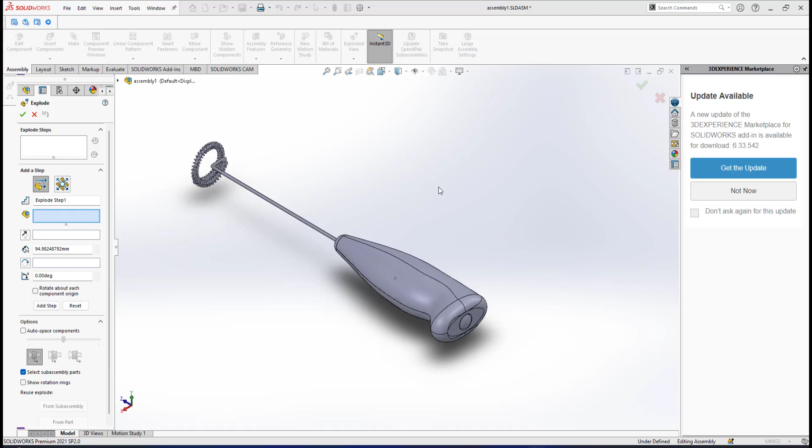Before we do the exploded view of this Frother, looking at the settings on the left, the first thing is about explode steps. Explode steps mean that whatever part or component you pick and move to a different position will be recorded as an explode step. For example, if I select this top casing and move it to a different location, it would be recorded as explode step 1.

Then I select the bottom casing, put it to a different position, and it will be recorded as explode step 2, and so on.

In order for us to do this exploded view of the Frother, the first thing is that we need to plan how we will dismantle this product.

Logically, when you look at this Frother in full assembly mode, if you want to dismantle it, the first thing is deciding what components or group of components you will open first and move into a different position, before you can dismantle the other components. This means we need to plan the order in which we dismantle the product.

For this Frother, the way I plan it, if I want to dismantle it, the first group of components I will open is this opening lid at the back, along with all the related components attached to it.

Logically, if you want to replace the two AAA batteries, you will slide out this opening lid and its group, and then you can replace the batteries. So this is the first group that I will record as explode step 1.

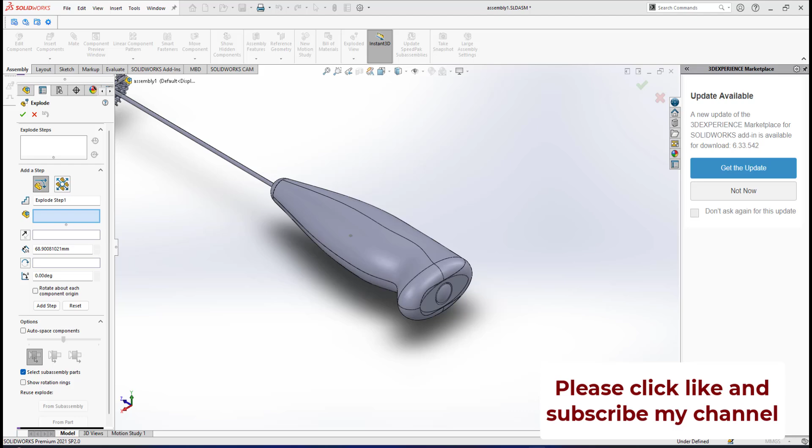Then for explode step 3, I will select the top casing, so I can dismantle it and put it in a location above. As for the bottom casing, I cannot move it since it acts like a platform or base, meaning the bottom casing stays at a stationary point and cannot be moved because it will be the base.

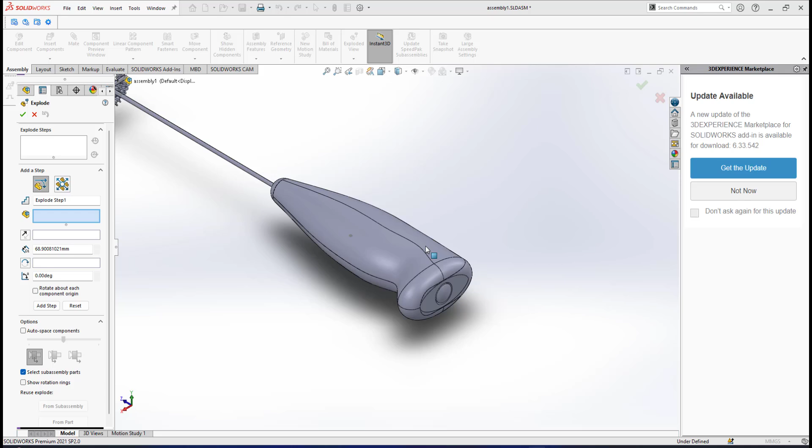Once the top casing is placed above, I then select the group consisting of the rod, the flexible coupler, the cap, and the motor, and move them to a different location. This is how I plan to dismantle the product logically, as if working with the physical components of this Frother.

Now let me show you. The first step is to select here - my first exploded step will be the group of this opening lid and all the components attached to it.

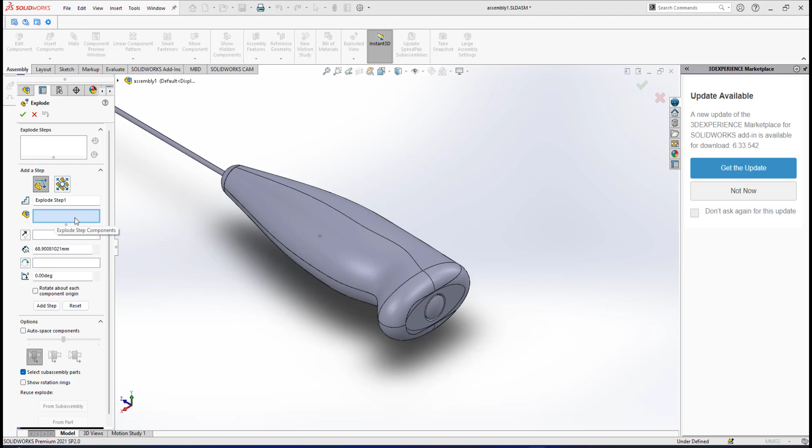Under the settings on the left, explode step 1 is highlighted, but I have not yet selected which component to put here as my group for explode step 1. Let me zoom out a little bit. Here we have the list.

I click open the list here. My group to be exploded for step 1 is the opening lid and all the related components attached to it. So I will select the opening lid, and then all the related components, like the push button.

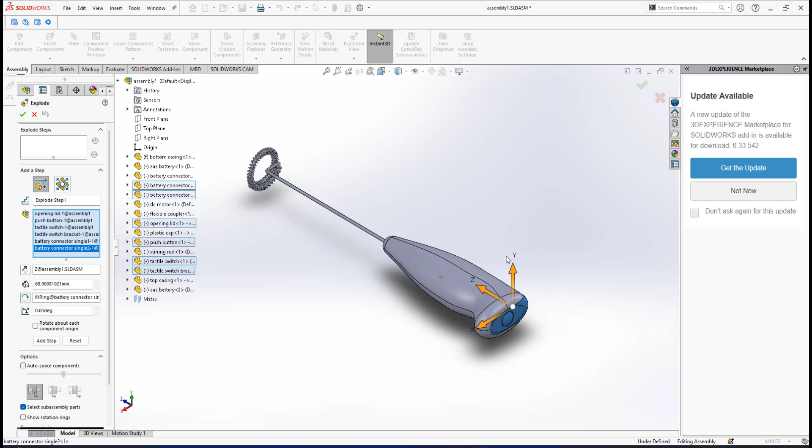It's listed here: the tactile switch bracket, the battery connector single 1, battery connector single 2, and the push button already selected, the tactile switch already selected. So that's all the group of the opening lid and the components attached to it. Here in this icon, if you look at the group of components, I kind of have an icon like an axis.

I want to slide it in the X direction, to the right direction. So I will go for X direction, and move it to this location, putting it into this location. SolidWorks will record it as explode step 1.

But the important thing here, you must click done. If you don't click done, it means SolidWorks will not read your first setting as explode step 1. So I click done, and only after that will it be recorded as explode step 1.

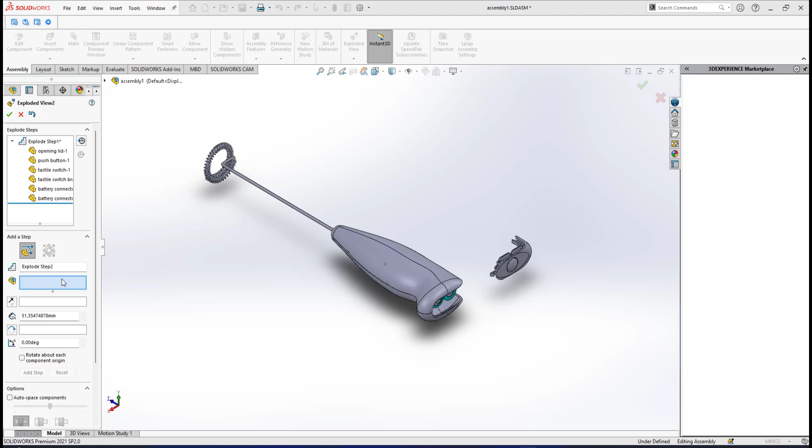If you look at the setting on the left, explode step 1, all the related components have already been recorded for explode step 1. It means this opening lid and all the components have been slid out to the right. Now the setting is asking about explode step 2.

Logically, to dismantle this frother, for explode step 2 I will remove these two AAA batteries and put them in this location. So for explode step 2, I will select these two AAA batteries.

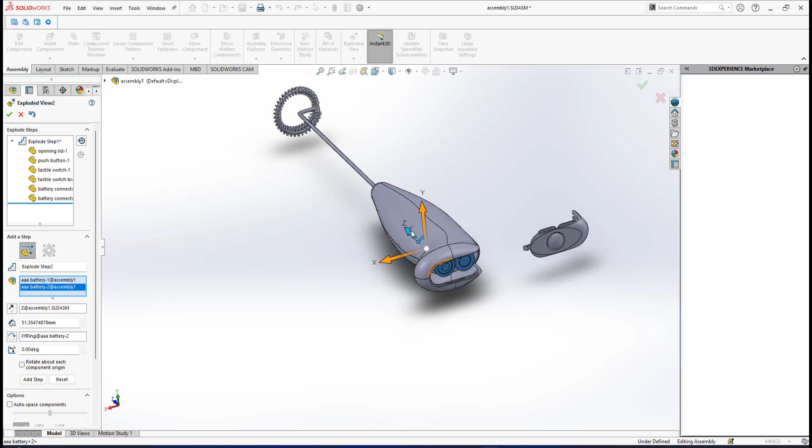So we have the axis here. I will go for Z direction, and bring it out until the position I want them to be. You can also give a distance here, in the Z direction.

I just leave the two AAA batteries at that location. So I must click done — this is important, you must click done — so SolidWorks will record it as explode step 2. So we see here explode step 2, we have this.

Be careful about it. When you click on explode step 2, it's still asking which component to put into this explode step 2. For example, if I highlight like this, it's kind of like editing. Whatever you do, you cannot straight away — if I put my mouse and highlight explode step 2, it's asking what component I need to add more for this explode step 2.

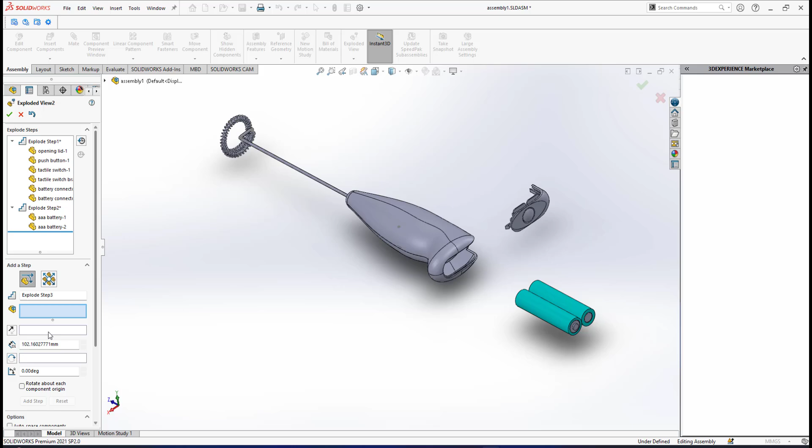Already done — select these two AAA batteries. Whatever you do, once you highlight here, you must click done first, so it will go to explode step 3. Because the setting here is quite sensitive, make sure that when you're editing, you click done. Then only will it go to the next step, explode step 3. Be aware of that.

After I've removed these two AAA batteries, my step 3 will be, of course, the top casing. So I will select this top casing. Now under explode step 3, the top casing is already listed.

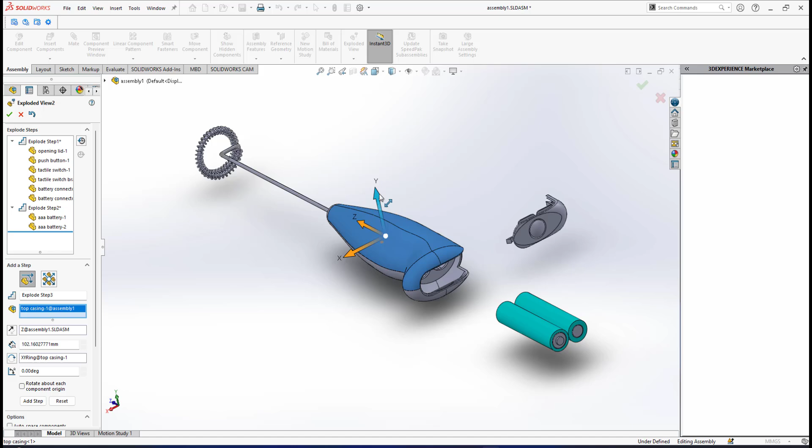So I bring my mouse to this Y direction, and bring it up until this position. Be careful, you need to click done, so it will be confirmed and recorded as explode step 3, and it will then ask about explode step 4.

For explode step 4, since I've put my top casing in the above position, the thing I need to do is select these metal connectors and put them above. So I select these metal connectors and put them up until this location. Then I must click done.

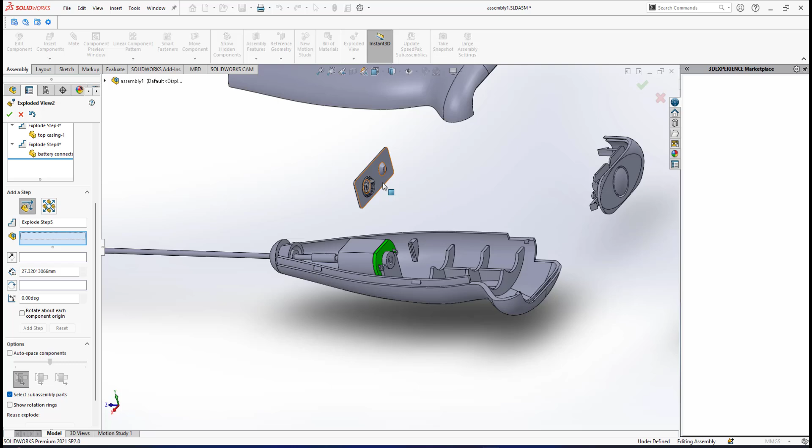Actually, you can edit it back to adjust the location of your component. So I just leave it at that position for these metal connectors. Now it's asking about explode step 5.

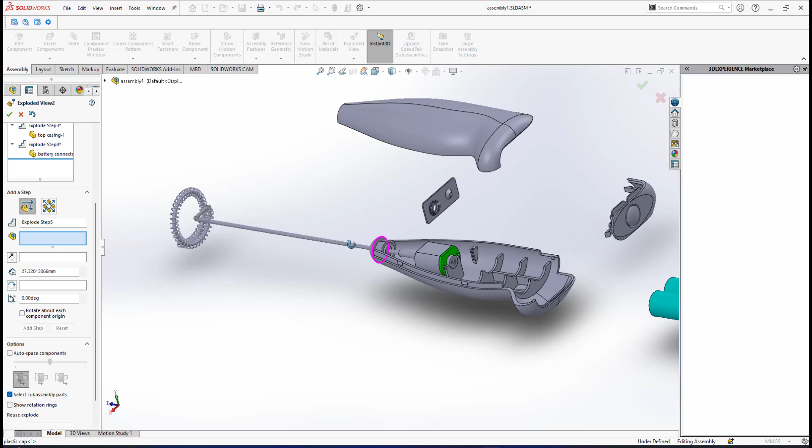For explode step 5, I cannot just simply pick this coupler and put it in a different location — I have to make this disassembly in order. So since I've put the metal connectors up here, my next step is that I cannot simply select the motor and put it up for explode step 5, because it's kind of like we have a group here.

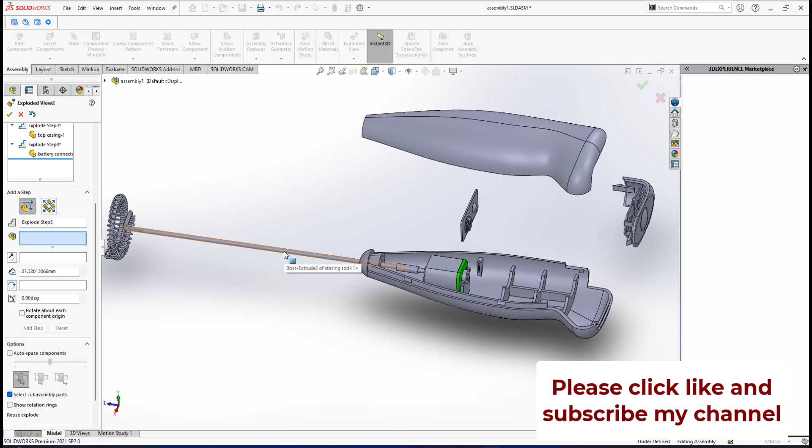This motor, the coupler, the cap and the shaft are kind of like under one group. So for explode step 5, I will select the motor, the coupler, the cap and the stirring rod, and put it above first at this location.

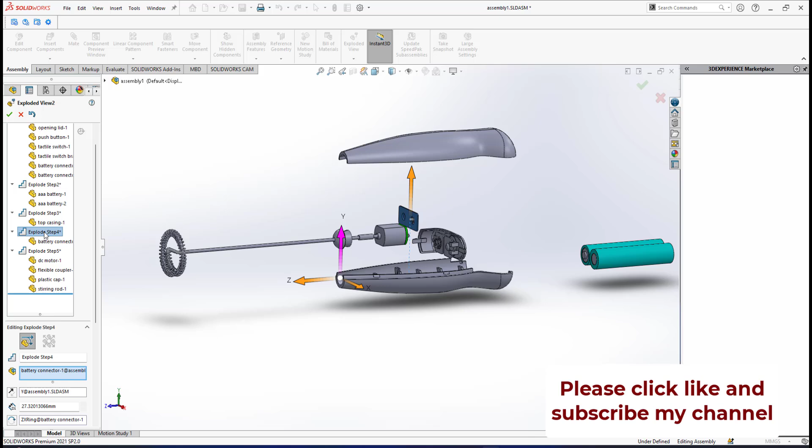Okay, let's say if I want to adjust the height of these metal connectors, I think it should be close to that DC motor location. So I can scroll up here. Since that battery connector is explode step 4, I click at that explode step 4, then I bring these metal connectors up a little bit above. Alright, so I must click done to confirm it.

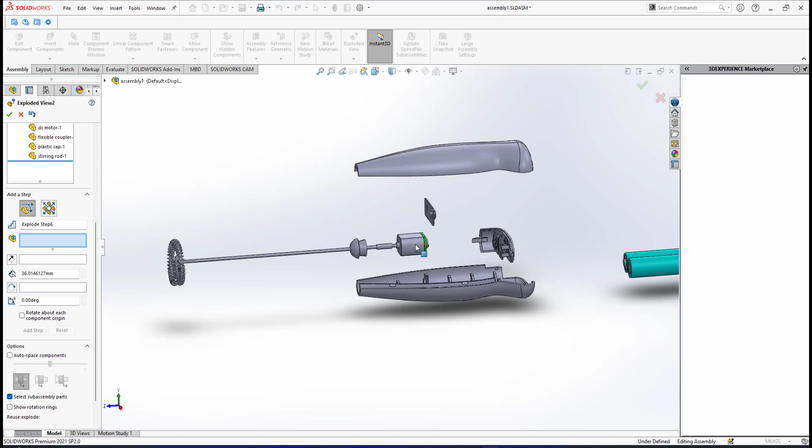Okay, now it's asking about explode step 6. Since I have this group of DC motor, coupler, cap, and rod, what I will do is slide this stirring rod up until this location. Then I click done, so this will be explode step 6. Now it's asking about explode step 7.

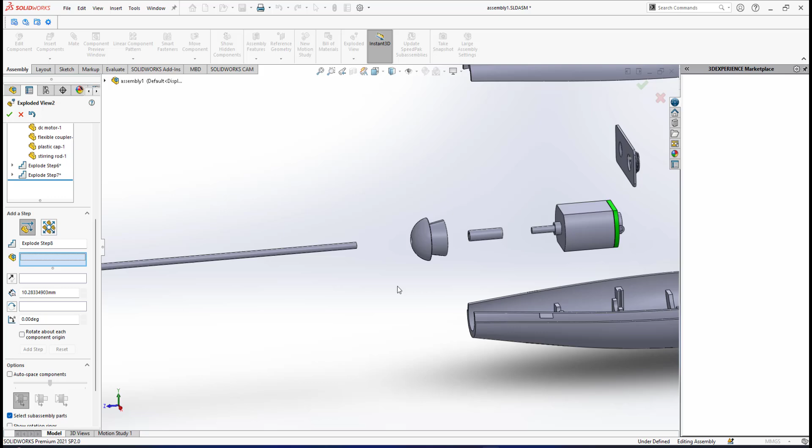It's kind of like I select this coupler and also this cap, and move it up until this position, so it will be recorded as explode step 7. Then I click done. Right now I've set my explode steps from 1 to explode step 7.

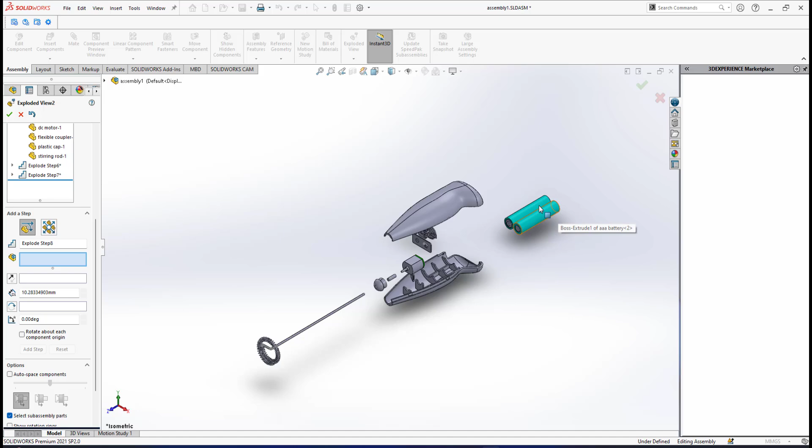Alright, before I go for explode step 8, let me go to standard view. Okay, this is the view that I want the exploded view to be, this is standard ISO view. So if we look from this view, I need to do some adjustment in terms of the height level of my component. For example, this top casing here is too low.

Okay, I can scroll up here. Top casing is explode step 3. I click at that explode step 3, and bring this icon up a little bit, so it can show the features of this opening lid. Alright, I have adjusted the level of explode step 3. I'm still editing explode step 3 here. If you look at the setting on the left, make sure that any adjustment I've made, I must click done, so it will be confirmed and recorded.

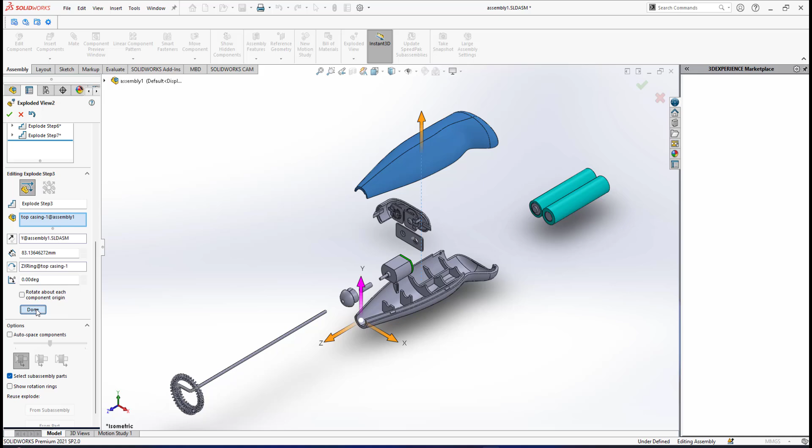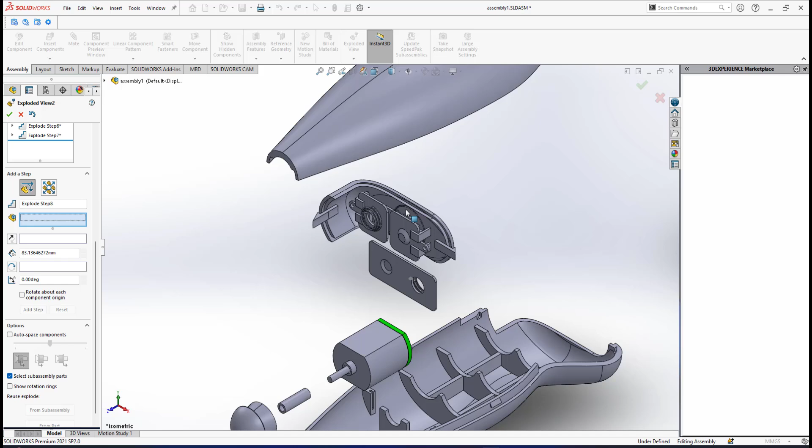Okay, now it's asking about explode step 8. About explode step 8, since I've already dismantled all the components shown here, the only one left is this sub-assembly of this opening lid. So for explode step 8, I need to really plan it.

Okay, let me just scroll it like this. Later I will go to standard ISO view. About this explode step 8, this will be the explode step for this sub-assembly of the opening lid. I will keep this opening lid as the base, I will not move it.

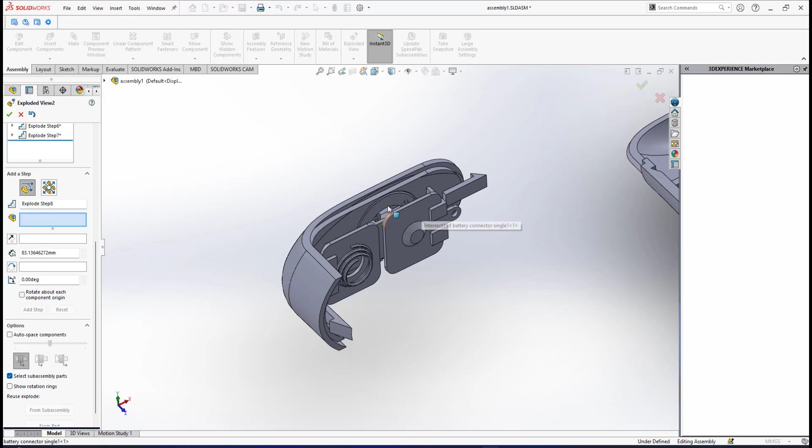So what I need to move for explode step 8 is select these two metal slots here, because we disassemble this component in order. So I will select these two metal slots, and bring them up to this position. It's okay, you can adjust the height later. Okay, I just click done, so it will be recorded as explode step 8.

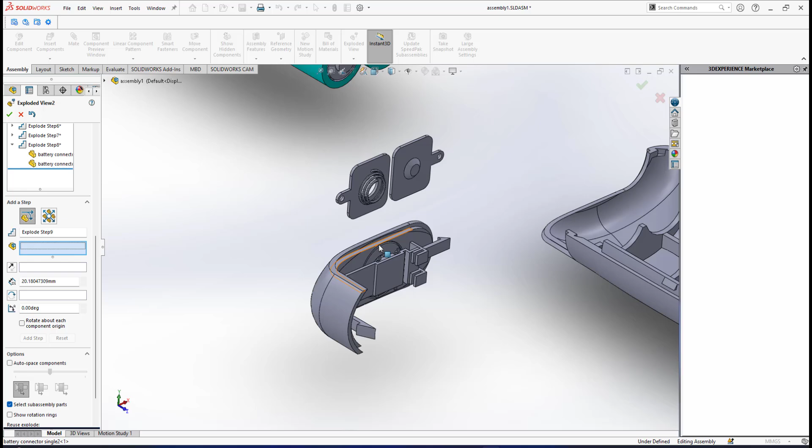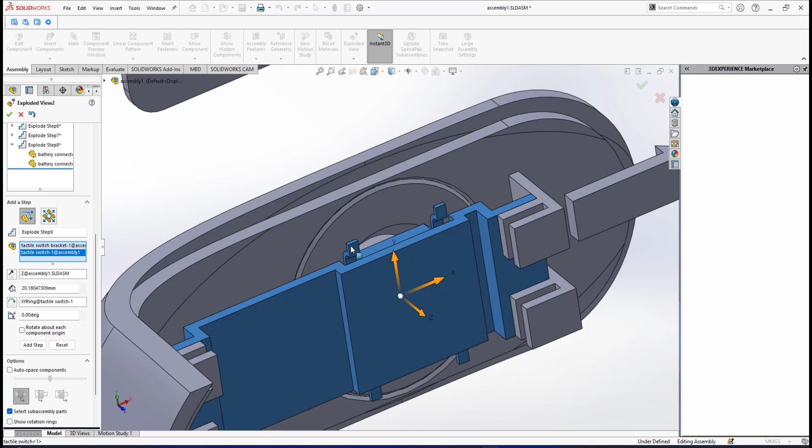Alright, about explode step 9, if I have removed these metal connectors, I put it above. Logically, I will remove this bracket here for explode step 9, bracket and the tactile switch, because they are together. So this will be my explode step number 9. Okay, I just put it there, up to this location. I must click done, so it will set the setting for explode step 9.

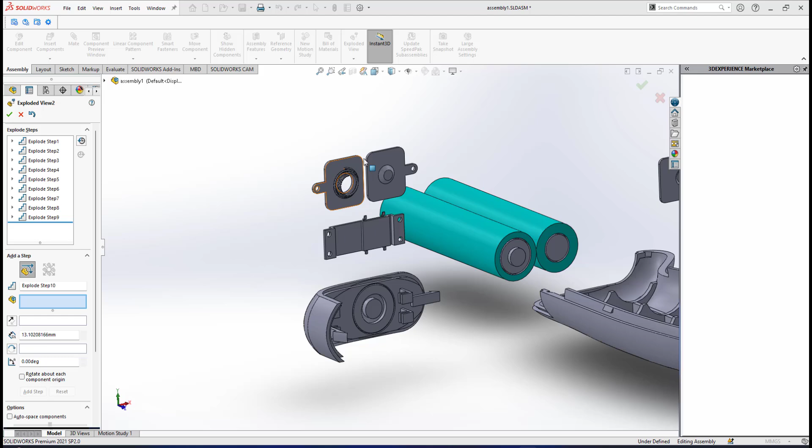Okay, let's say if I want to adjust this explode step 8, I click at explode step 8, I adjust it a little bit like this, and I click done. Any adjustment, you must click done to confirm it. Before I go for explode step 10, about these two metal connectors here, I need to do adjustment, this is under explode step 8. I click at explode step 8, I bring it a little bit above, and click done to confirm it.

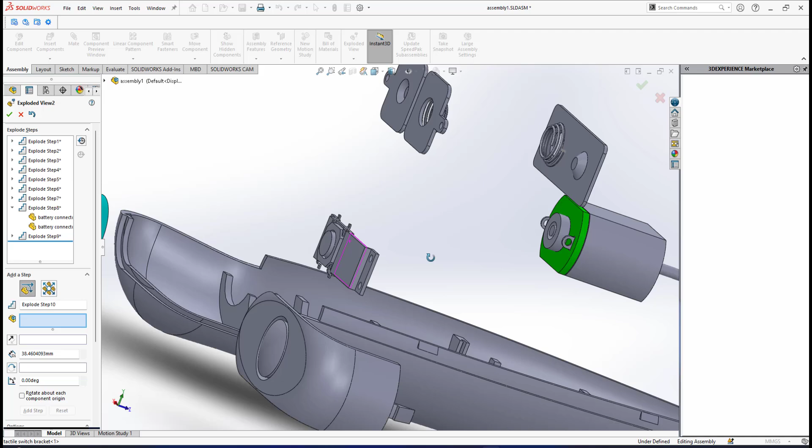Okay, about this bracket here and the tactile switch are still together. So about explode step 10, I will select this tactile switch and bring it to this location, sliding it out above. Alright, I click at done.

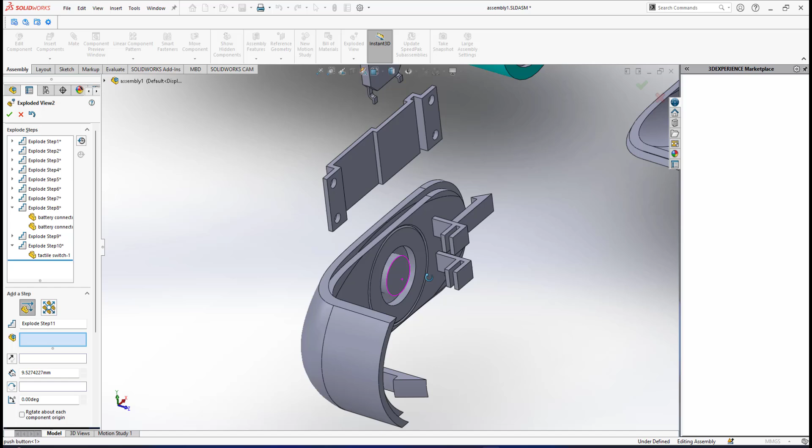So it will be recorded as explode step 10. I think the last one, explode step 11, will be this push button. I cannot slide it out to this direction because logically you cannot remove the push button that way, since it's already prevented by the shoulder of this opening lid. So for explode step 11, I will select this push button and it goes here. This will be my explode step 11. I click done.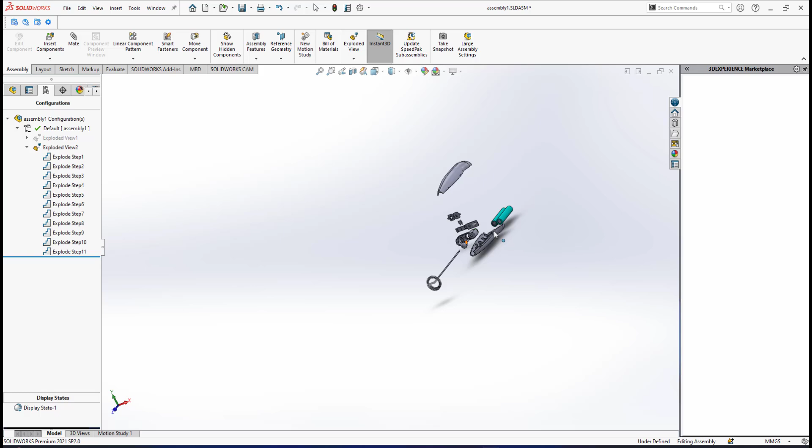Then I click OK. So it means that I have already set the exploded view for all my components. Let me go to standard view. So this is my exploded view of my component.

Since I've completed this exploded view of the components of this milk frother, if you look at the setting on the left, I'm now in tab number 3, the configuration manager. By default we are in feature manager, like the common listing for assembly. About the exploded step, you can check under the third icon, configuration manager. If you look at the list here, I have exploded view 2. Exploded view 1 is grayed out because I've done this before. What I've shown you just now is my exploded view 2.

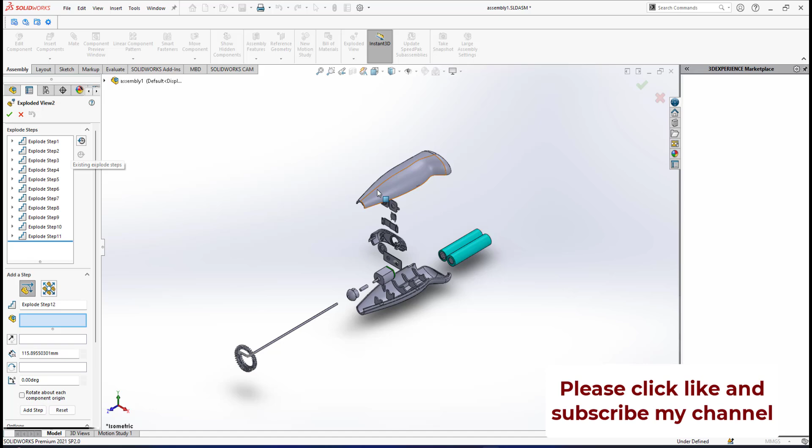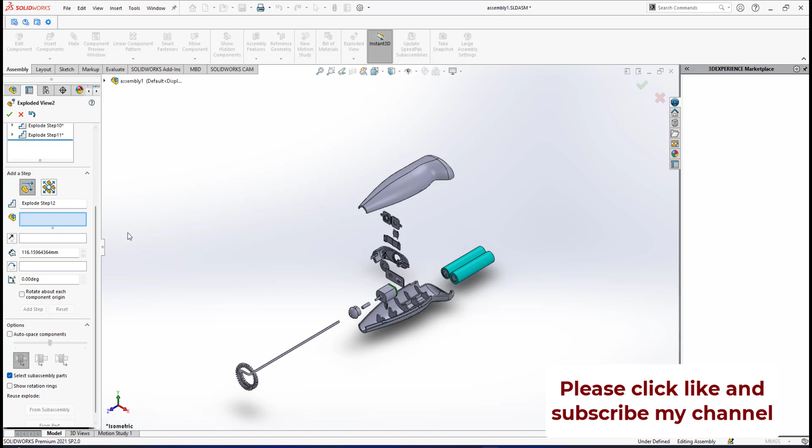For example, if I want to do a final adjustment for this top casing, I want to slide it upward a little bit. So in my exploded view, I click here, right click the mouse, and go to edit feature. So I have the setting for this exploded step. Since my top casing is explode step 3, I click explode step 3, then do the final adjustment to make sure the top casing at this position shows these two metal connectors. Whatever adjustment I made, I have to click done. Let me click OK. So this will be my final adjustment.

If you look here on the left, we are on configuration manager. By default we are on feature manager first. Under the feature manager, we have the first list, assembly one. If I bring my mouse here and right click, I go for collapse. So we go into collapse mode, and this is the full assembly mode. If I right click again, I go for explode, and we go into explode mode. Let's say if I bring my mouse, I go for collapse mode again.

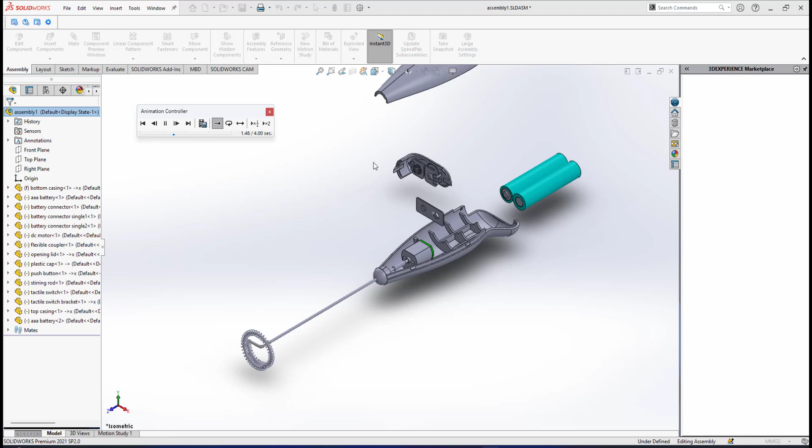So I can even play animation for this. If I bring my mouse here, I have an option here, animate explode. So we can show a kind of animation or simulation that shows how our component is disassembled in order. Let me play again. Let me zoom it a little bit. I can play this again.

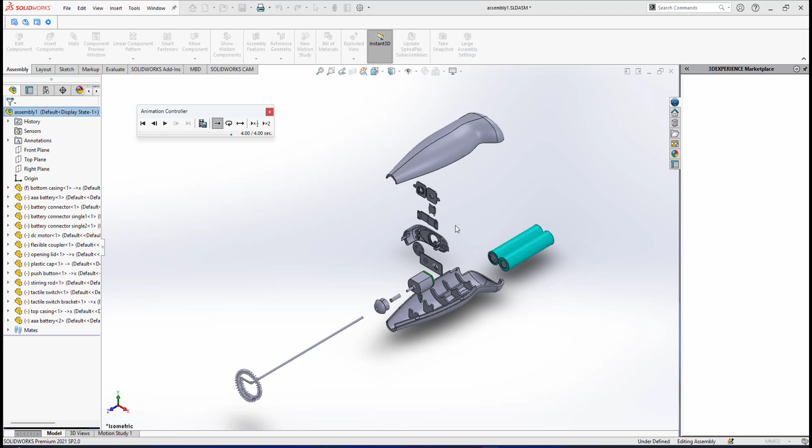So we can even save this animation file, maybe to send to the client or another department, kind of explaining how this product works, how the components relate to each other, by showing this motion. We can even go under explode mode, play animation, animate collapse. It can even go in the reverse direction. Now it shows how this product is assembled back to full assembly.

The next thing to do, since I've made this exploded view of this milk frother and all the components are in position in exploded view mode, later I will show you in my next video, inshallah, how I will do assembly drawing and also exploded view drawing. Because for this Milk Frother project, we need to produce a set of working drawings.

A set of working drawings of a product means we have to show the first drawing, which will be the assembly drawing in 2D or orthographic. The second one will be the exploded view drawing. That exploded view drawing is not in orthographic, but shown in isometric mode. So this view here, as shown, is isometric mode.

But when people read the exploded view drawing, because it is more user friendly to show the product, how the product is disassembled, if we just produce the drawing like this, it's kind of difficult for them to understand.

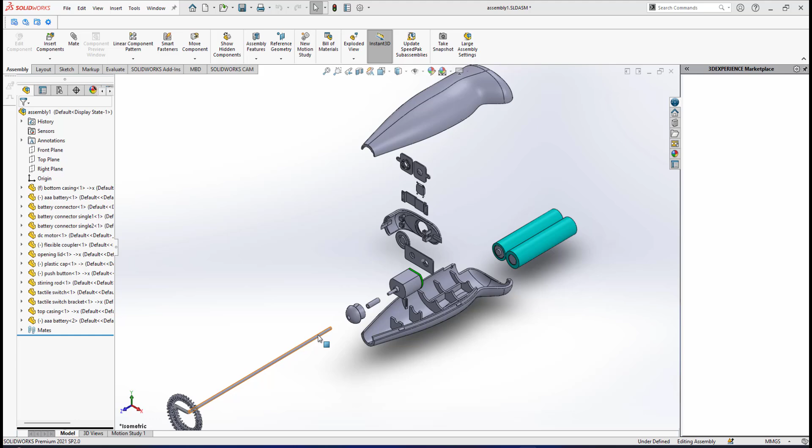For example, how are these things connected, related to each other? In the SolidWorks file, I need to create a path showing the line of how this part gets disassembled. For example, how do these two batteries get mounted onto this rib? I need to show the line, the path of how this battery slides in and where it will be mounted. In SolidWorks, this is called an exploded line sketch. So for all these components, I need to show the path, the line of the component being disassembled, and how this path connects to each other.

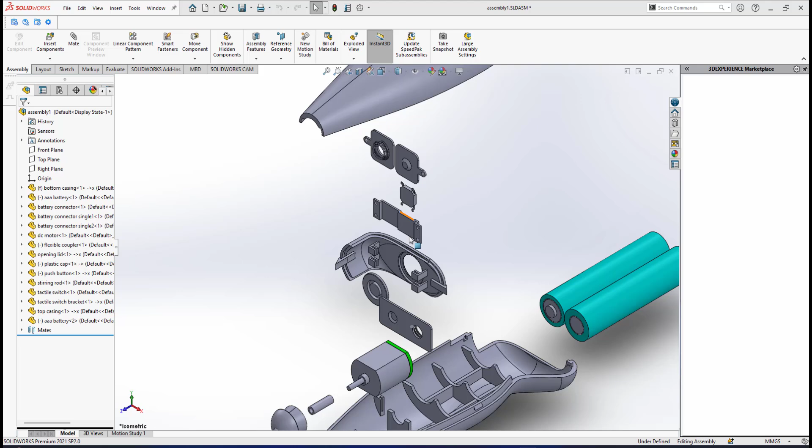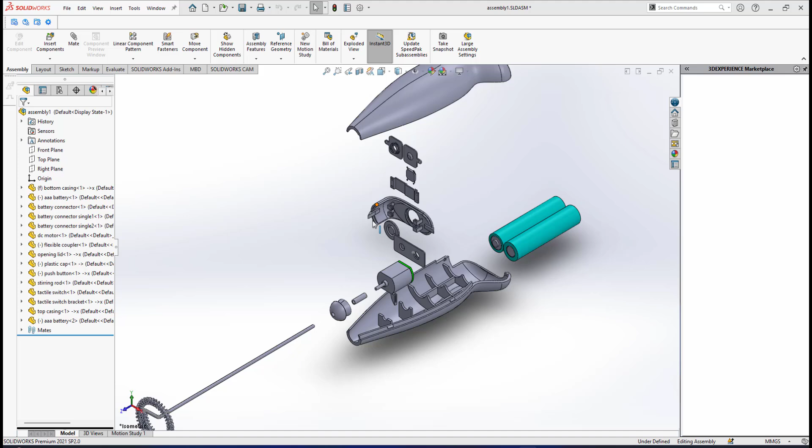For example, this tactile switch will slot into here. I will do the path of the movement of this tactile switch fitting into the slot, and so on. Even here, I can show the path of this rod connecting straight to the shaft of the motor. I need to show this path line. In SolidWorks, it is called exploded line sketch.

To do this exploded line sketch, under the assembly, under this exploded view, I click the arrow here. So the second one will be explode line sketch. To do the explode line sketch, if you look at the settings on the left, it asks for the route line. Route line will be your path line. So we will create one here.

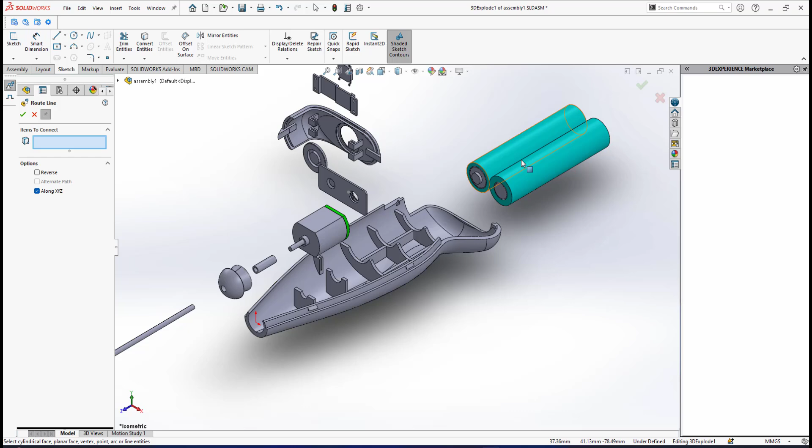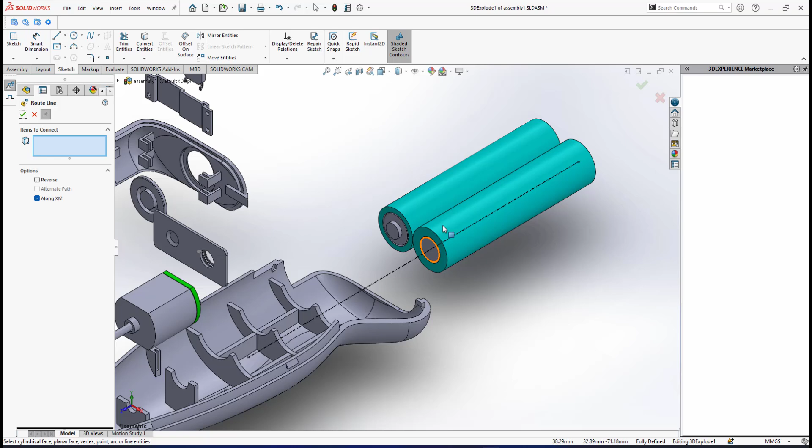I'll go for the easiest one first, these two batteries. I can straight away show how this battery slides onto this cylindrical surface of the rib. For items to connect, I select the cylindrical surface of this battery, and the second one, the cylindrical surface of this rib. SolidWorks shows the outline of this exploded line sketch, a straight line like this. I click OK, and we have this dotted line shown here. Just ignore the internal line, because later in the drawing the hidden line will not be shown. Whatever is shown is already whatever we can see here.

Now about the second one, the easiest one is the second battery here, this one and this cylindrical surface. So I create another one here, click OK. I just go for the easiest one to show the exploded line sketch.

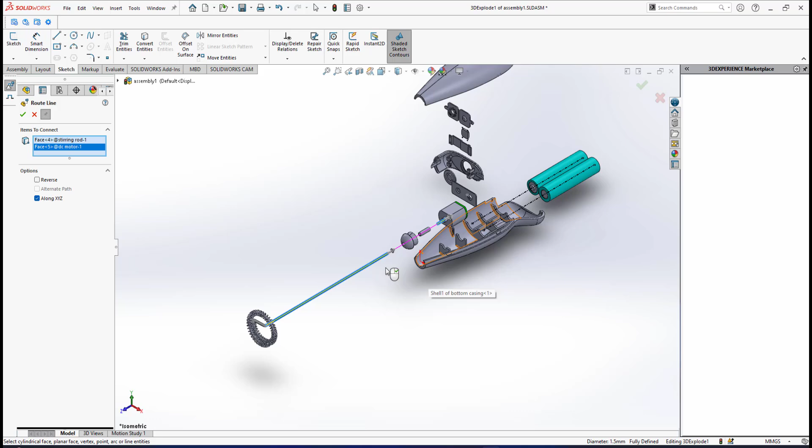For example, the stirring rod passes through, crosses this plastic cap, these connectors, and straight away to the shaft of the motor. For this exploded line sketch, I select the cylindrical surface of this rod straight to the cylindrical surface of the shaft of the motor. So it creates this exploded line sketch, then I click OK.

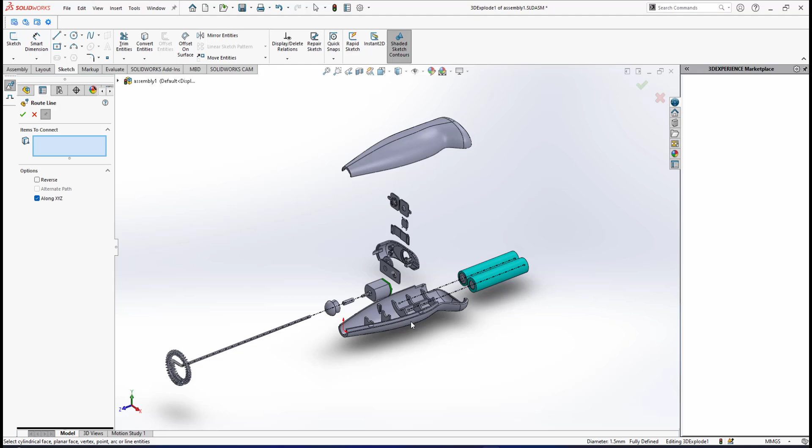Now I have done this group from rod up until the shaft of motor. Let me go for the easy ones first. About here, I want to show that this motor will be mounted, this cylindrical surface of the motor will be mounted on the cylindrical surface of this rib. So I need to show the exploded line sketch of how this motor will be mounted onto these two ribs.

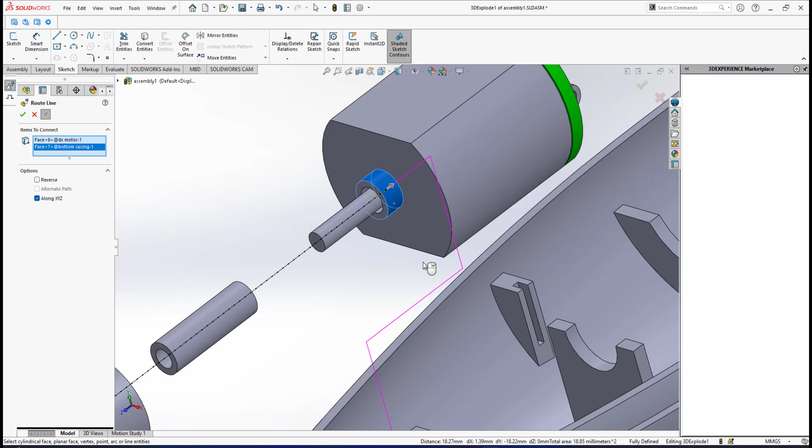If I simply select the cylindrical surface here and the cylindrical surface of this rib, SolidWorks cannot show a straight path downward. It produces a zigzag outline like that. If I click at this pointing arrow, it will search for an alternate route, but the path still goes in a zigzag direction.

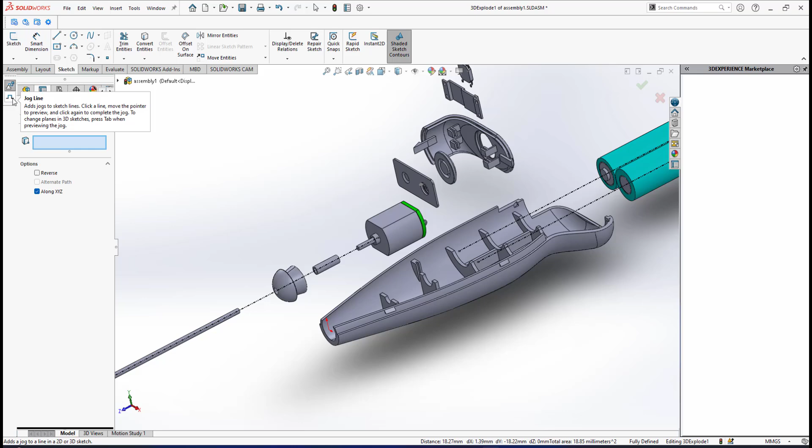So in this case, let me clear this thing, I think I cleared everything. I don't want it to be like this, meaning I don't want to go for the standard route line. If you look on the left side, the first option is about the route line, so the second is about the jog line. If I click at the jog line, it means we manually create a line to show the path, just a line showing the direction of this cylindrical surface mounted onto this cylindrical surface. Now I'm in jog line mode, so up here I can create a line.

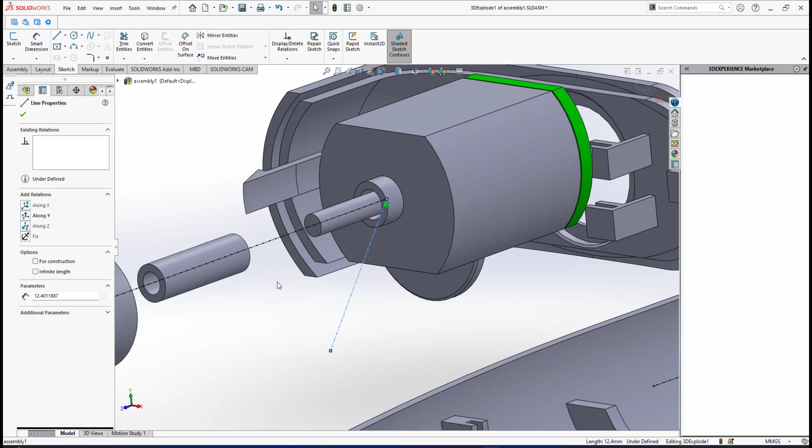I'll bring my mouse here so it can snap to that center point of the outline of the circle. I just create a line like this, pick anywhere, and right click to terminate it. Then I select the line. If you look at the axis here, Y is pointing straight upward, so I make sure this is along Y, in vertical mode.

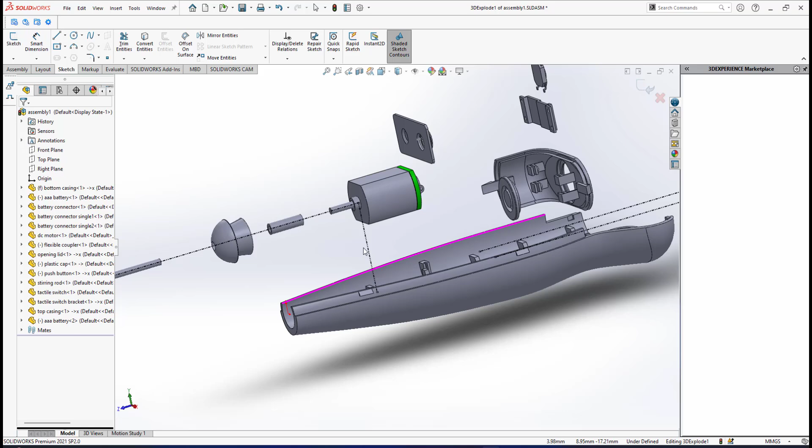Let me drag this to the view. I select this outline and bring it as long as it's close to that point, so it can show the path of this motor. This cylindrical surface of the motor will be mounted onto the cylindrical surface of this rib.

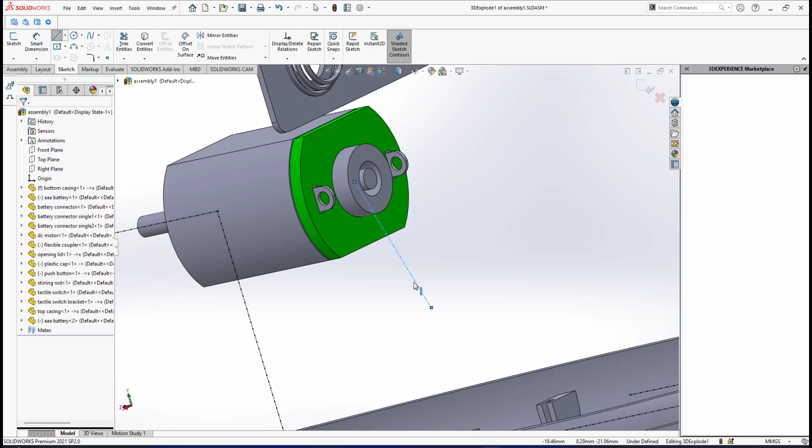I'll do the same here at the back. I'll create a line since I'm still under jog line of this exploded line sketch. I bring my mouse here, snap to that center point, click like this, right click mouse, select the line, and make sure it's along Y. Then I bring this point up until, it doesn't have to be snap coincident, but as long as it shows the path.

Okay, that's good. Now I'll do the same thing for these metal connectors here. I'll go for the line, somewhere at this point, simply bring the line, select it, click it, then go along Y.

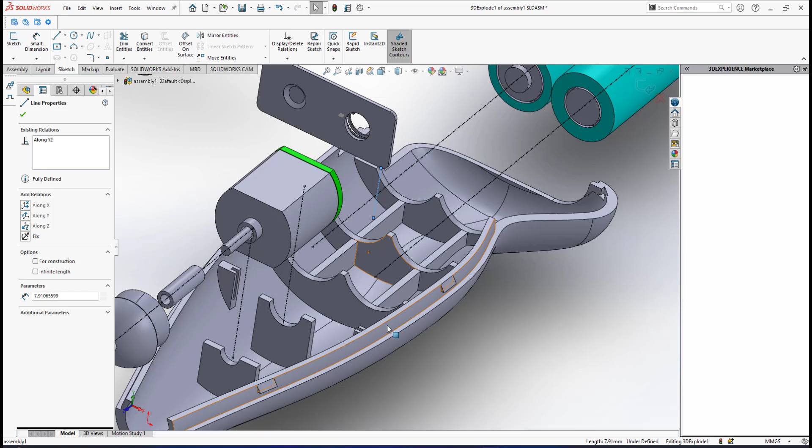It's kind of like we have to do this manually by using jog line. So I go to the proper view, then bring it so it can show the path. Ignore this thing, so I have the path there. Now I'll go for the second one here.

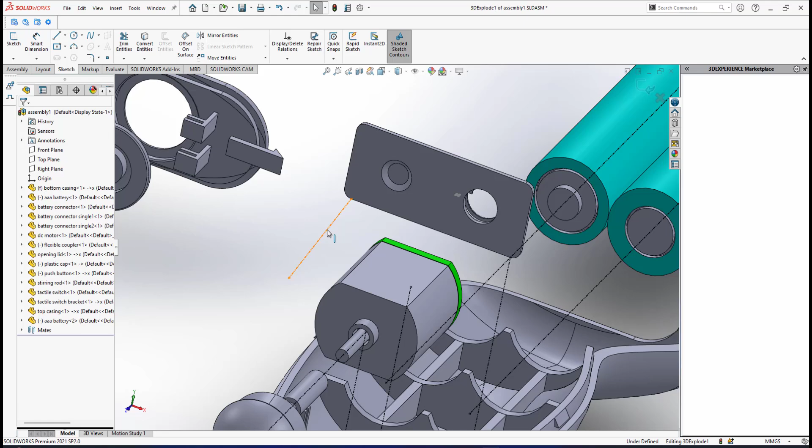I draw the line here at this corner point, bring it like this, then select, make sure along Y. Then I drag it up until about this location. So I have a path showing how this metal connector will be put onto this slot. Okay, I've done the batteries and the metal connectors.

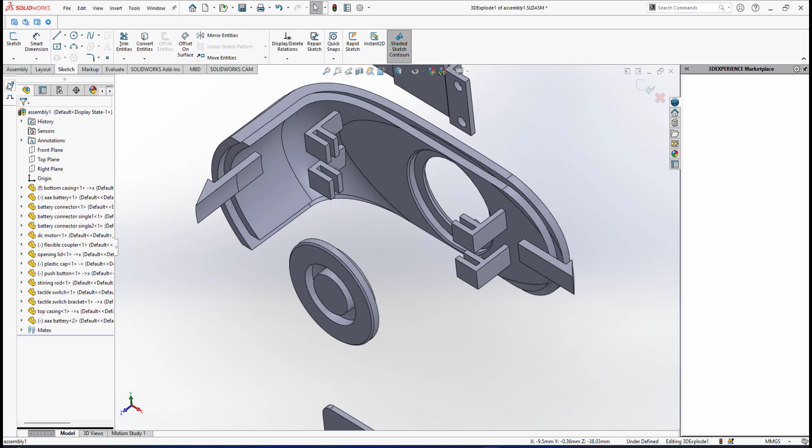The next one is about this: if you look here, we have a push button mounted onto this surface of this opening lid. Let me click the point first. If I go for a standard route line here, let me clear this thing. If I select the cylindrical surface of this push button and that cylindrical surface, SolidWorks will put the route line like this, kind of zigzag.

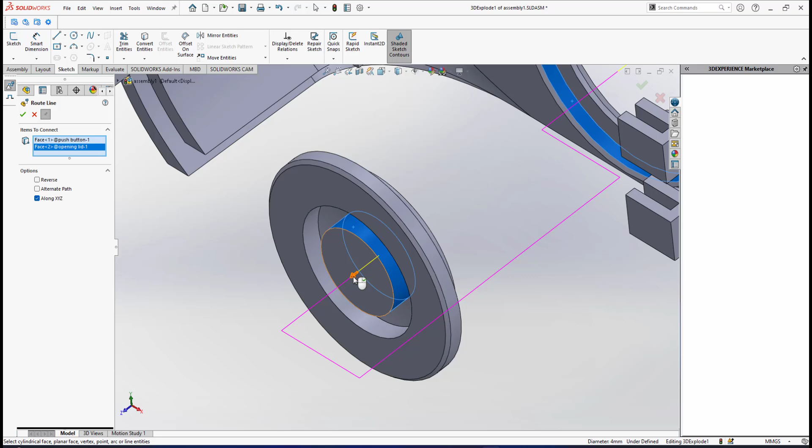So I can select this arrow and simply drag it, and now SolidWorks can put the shortest distance, the straight path. Then for this one I can do a standard route line. Okay, I have a route line there.

About the other components, for example, the next one: if you look here, the tactile switch will slide onto this slot. This tactile switch will be slotted onto this slot. For this one, I don't think I can use the standard route line, so I'll go for the second option, jog line. Okay, I'm now in jog line mode.

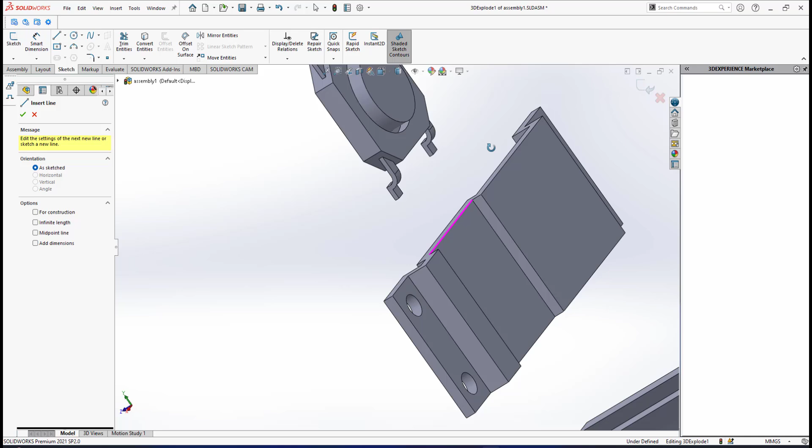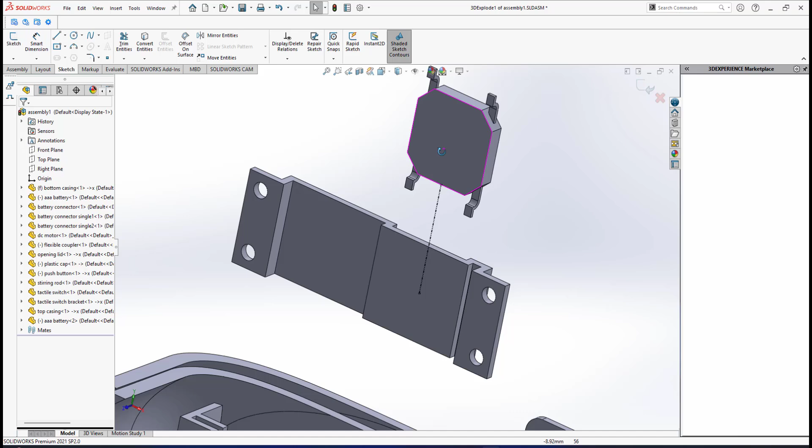I click at the line, so since we have edges and a middle point here, I just bring it like this. Make sure that since vertical is the Y axis, I select here and make sure it's along Y. Then I select this line and simply bring it like this. So we have a path of how this tactile switch will be slotted onto this slot of this bracket.

The next one: this bracket surface here has to be mounted onto this slot surface. I need to show at least a path there. Here I can do jog line again. I go for the line and select at that middle point, just bring it like this.

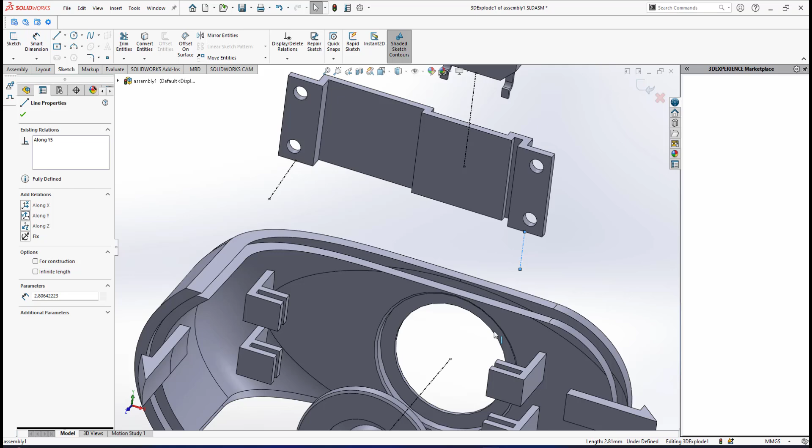I do the same here: jog line at that middle point, bring it like that. For this line, make sure it's along Y, then I bring it as long as it goes there, to show the path. I just ignore this thing. And same goes here, along Y, and I drag it like that.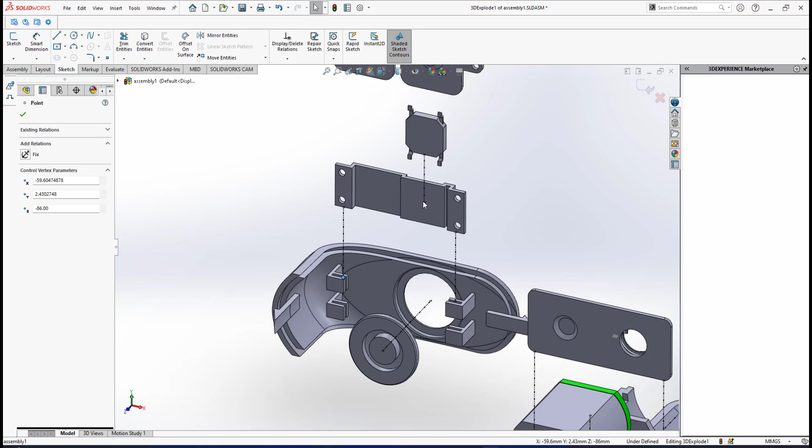Okay, let me check. I think that is good enough to show the path of this metal bracket, which will be mounted onto the surface of this arm.

Another thing is about these two metal connectors here. These metal connectors will slide onto the surface of the slot. So what I will do is go for this arm, since this arm will be put onto the slot. I will create a jog line again, going for the corner of this slot.

I just simply draw like this. And also I will draw another jog line at this point here. I just create it like that. Okay, this one I go for along Y.

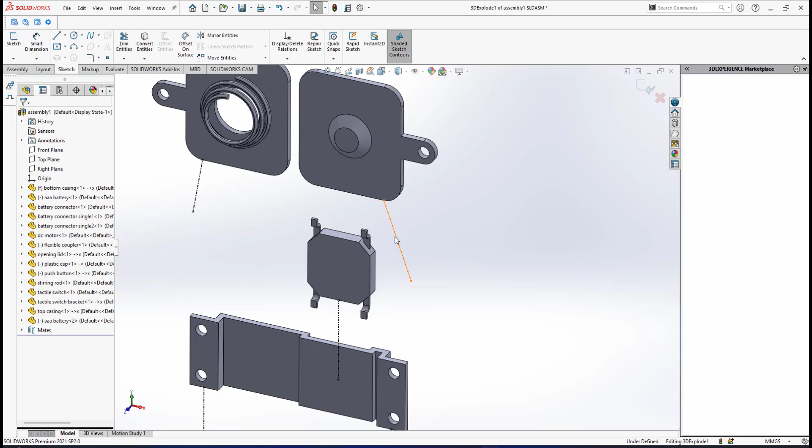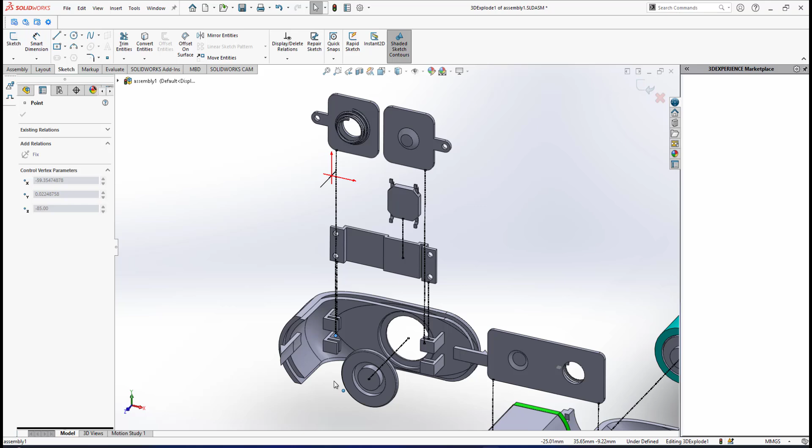Now I will drag this point up until it can show that it will be put onto the slot. Same goes here, this one I make it along Y, then I just drag it as long as it can show it will be mounted onto that slot. Just ignore this. So I have all the path lines.

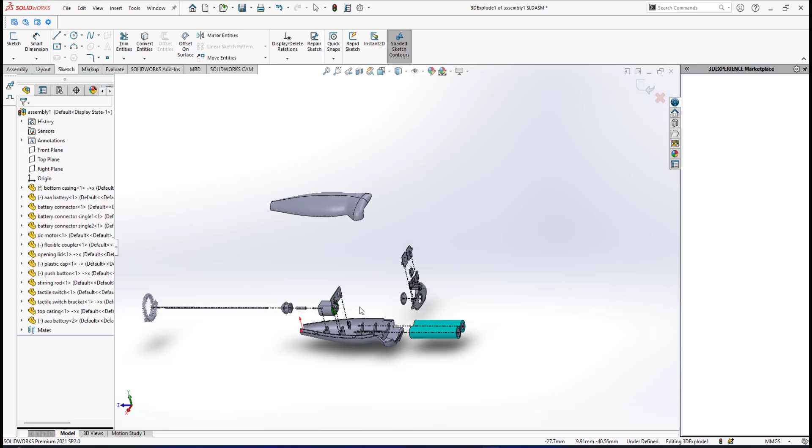I believe for this sub-assembly of this opening lid, I have done all the path line or exploded line sketch. The next thing is, what do I miss? The last one will be about this opening lid, because I have to show how this opening lid will be mounted onto this bottom casing.

So I have this hook here. I will do a line at the middle point of that hook. Here I will go for any point here.

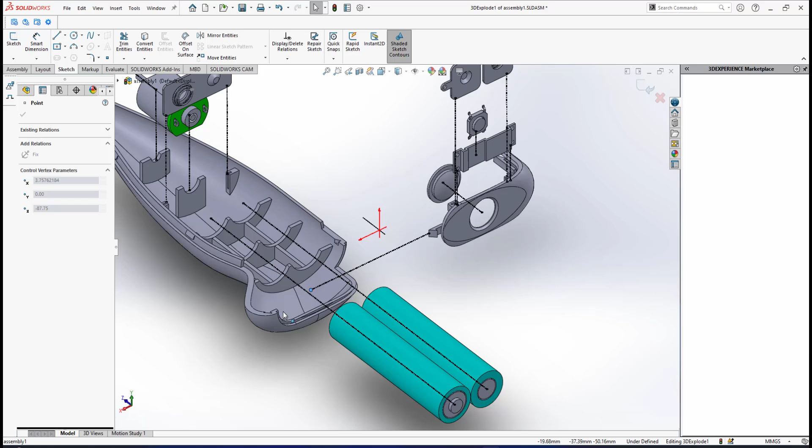For this one, it's not along Y. If you look on the axis, this will be along X. I select this line, so I make sure it's along X. So I will stretch this point, and bring it somewhere so it kind of goes to that groove.

It will be mounted onto the groove of this bottom casing. Kind of like we have this path showing this opening lid will be slid onto this bottom casing.

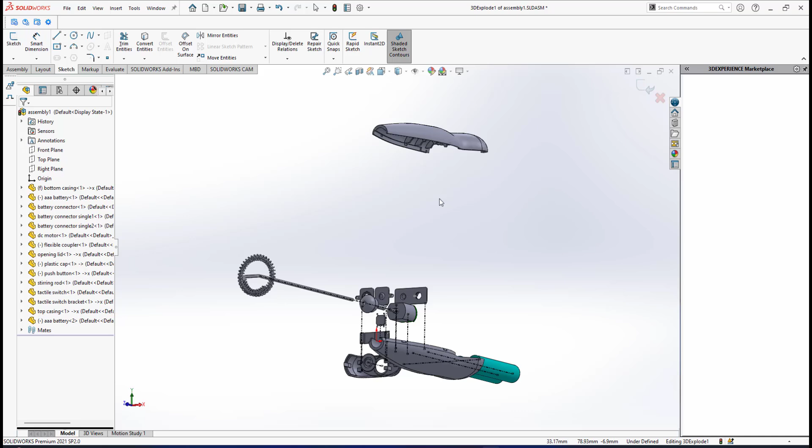All right, the last one will be the top casing here. The top casing will be mounted onto this bottom casing.

The last part to do this path line, I'm still under jog line here, is this top casing. I need to show the path line. This top casing will be mounted onto this bottom casing.

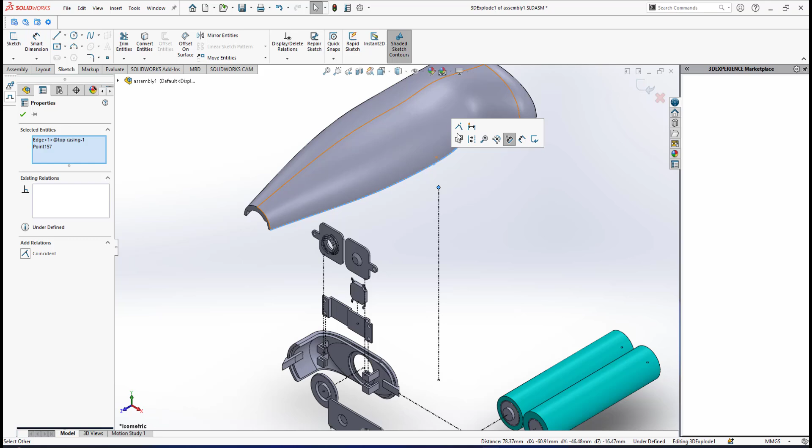All right, to do that, I'm still under jog line. I will create a line, so I will create simply any line not touching the edge here. Click any point like this. This one I make it along Y, it's vertical. About this point and the edge here, I make it coincide. Right, so I have the line there.

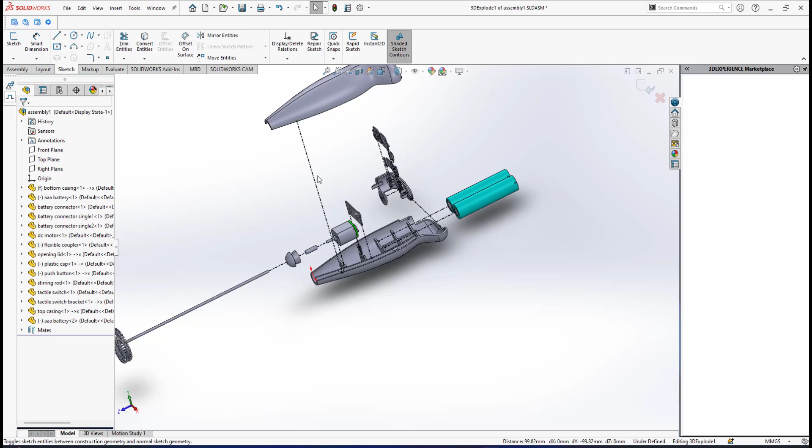It becomes shorter, it's okay. Now I select this point, and this edge I make it coincide. So I have this line. I can still slide it, but it remains coincide with the edges of that bottom casing and top casing, because I have set the relation to coincide.

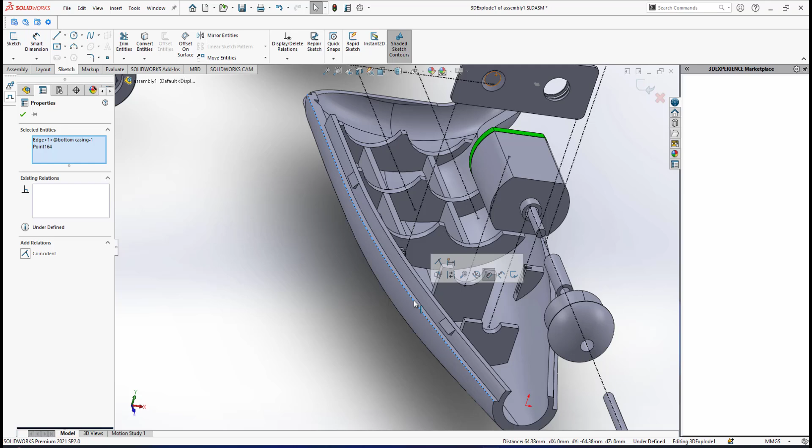So I will do the same here. I'm still on the jog line, so I will create a line here like this, and this line along Y. I will select this point and these edges, set the relation coincide, and about this point and these edges, I set it coincide. So I have this line.

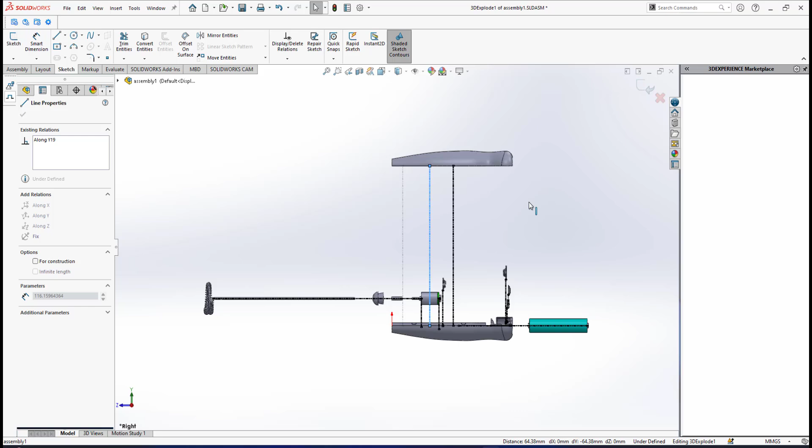I can still drag it. One way to do this, I want to make it in line, so I go for this view. About this line, I can still slide it, but it remains coincide with the edges of both top casing and bottom casing. I slide it a little bit to make sure that it's in line. Right, I think this is good enough, so I have this path line that can show this top casing mounted onto this bottom casing.

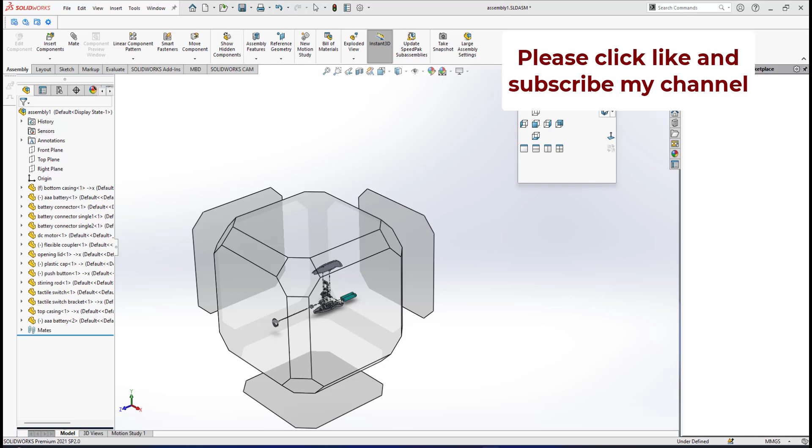Alright, I believe I've done all the exploded line sketch for this component. Alhamdulillah, I've completed my exploded view with the exploded line sketch.

Inshallah, in the next video I will show you how I will do the assembly drawing together with the exploded drawing of this milk frother. Okay, inshallah, I will see you in the next video.